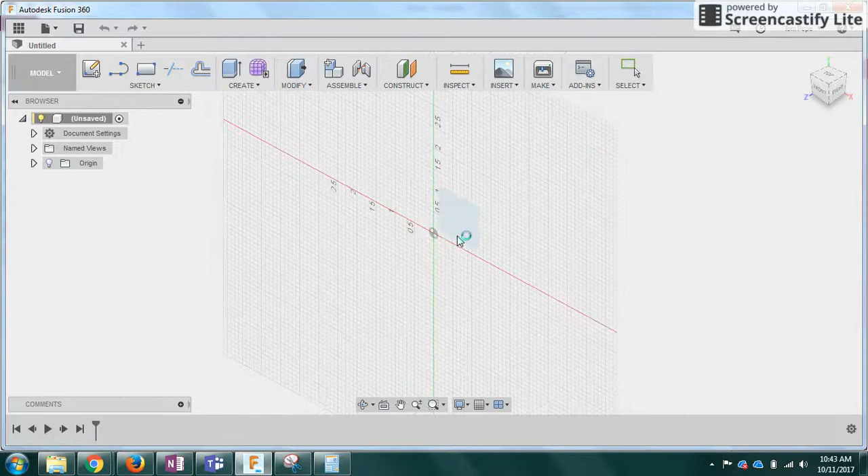So I always start with this 0.44 because it's the one that gives me the proper overall diameter. Back in Fusion, I'm just going to press C for circle, and I'm going to go 0.44.

Then this says it's 0.05. That's inside the other one, which is kind of a goofy way to measure. But what they're trying to get you to use is the offset tool. We haven't used it a lot, so I'm going to zoom in so I can see a little better.

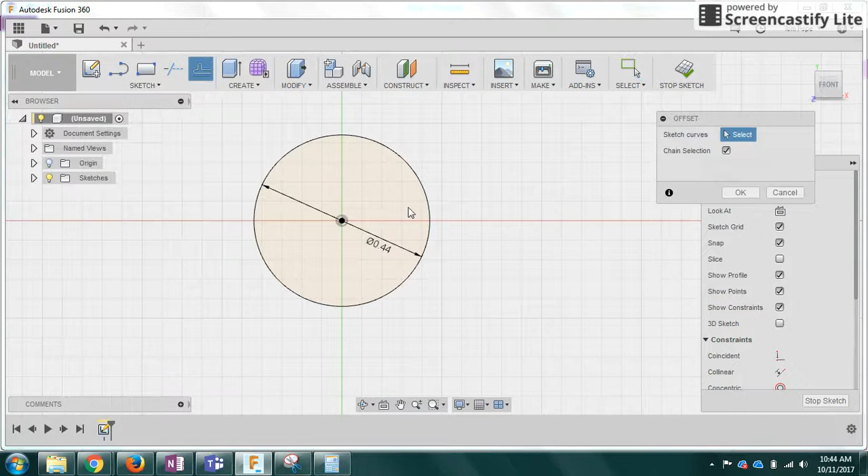To use the offset tool, it's here in your sketch palette. You can drop down to offset, but the hotkey is O. So I'm going to use O, and then you can see I can drag this in and out. I want to go negative 0.05.

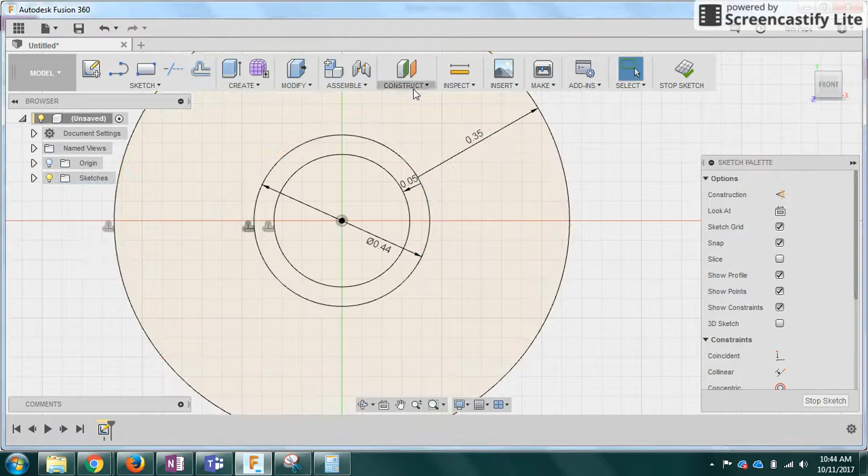Then this one is 0.35 outside the bigger ring, so I'm going to press O for offset again and go out 0.35. Then this guy has another 0.05 outside of it, so O for offset and 0.05. So I've got my 4 circles.

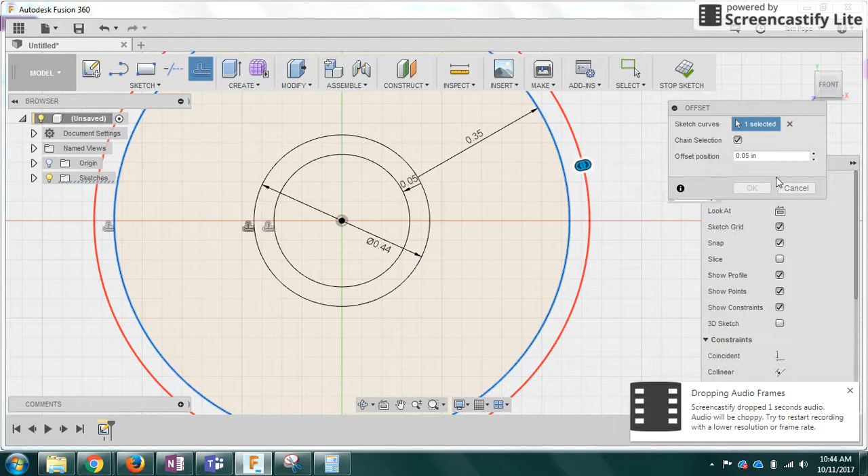Why didn't that one stick? Because if you offset it too many times, it won't let you do it again. It did that to me too, so I just made another circle. Well, that's super dumb. Yeah, I know, right? Depends on what he does.

When were you offsetting? What? When were you playing with that? Well, during the little video? No, I did part of this already. Oh, well, aren't you sneaky?

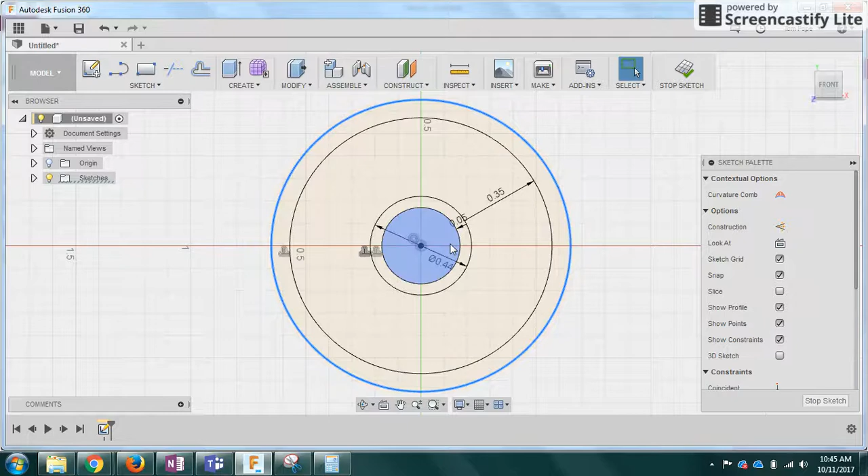Okay, so now the trouble is, with this not offsetting, we don't know what this dimension is. So what you can do is dimension between the two and just set it to be 0.05. That's another way, you can just make a new circle and dimension between things. Either way, you get it.

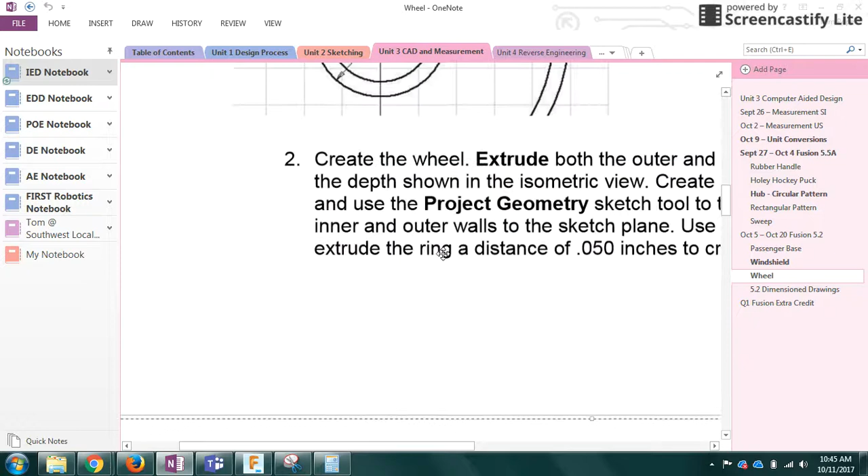Then you come back in here, and it shows you that you need to extrude. The trick to the extrusion is figuring out how far to go and how far should you go.

How far should I extrude this? 0.57. It's right here. So E to extrude, I want both of these spaces, and I want to go 0.57 inches. So it should look like that at this point.

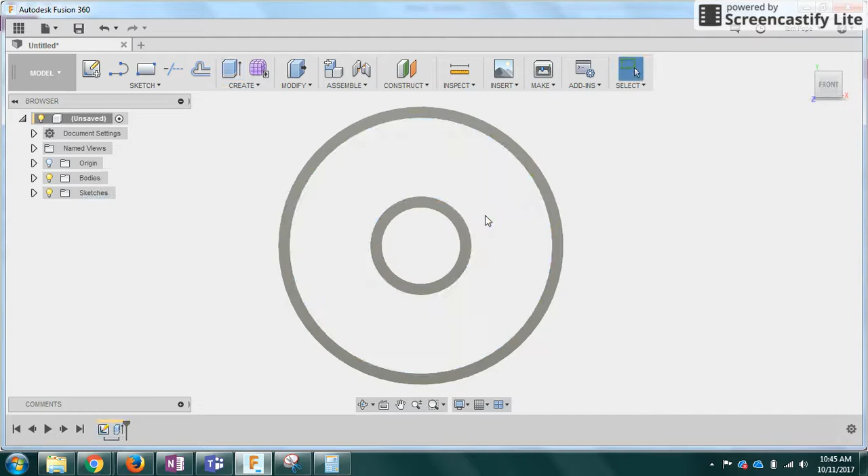Now, if you notice, they're extruding this, but they're leaving this kind of lip hanging. That's a really weird thing to do, and it...